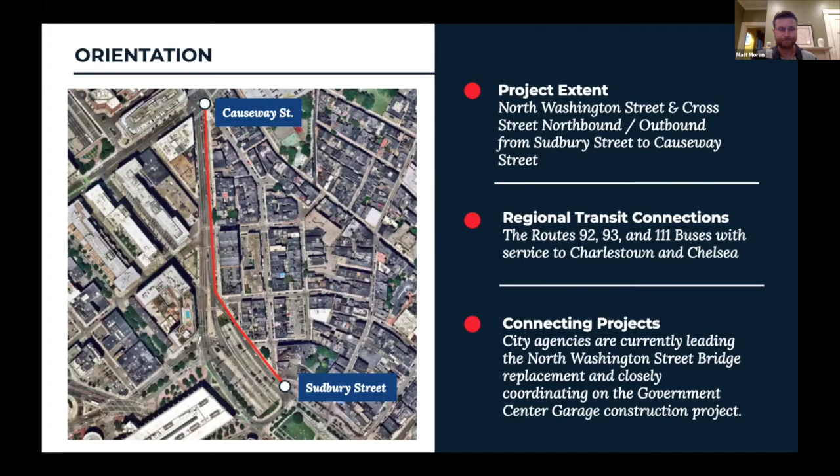So why North Washington Street? Before the pandemic, and to some extent now during the pandemic, we know that there's a variety of delays that hinder bus operations. I'll also note, we've heard concerns among residents of speeding and vehicles that move too fast in the corridor.

We also know that there's high enduring ridership on this corridor. The overall MBTA system, specifically the bus system, is carrying about 50% of its pre-COVID ridership. But the Route 111 specifically is actually up to its pre-COVID ridership numbers. That's 13 to 14,000 bus riders a day if you combine it with the 92 and the 93 and a few of the other regional routes that use North Washington Street.

So a huge number of people are on buses, and there's huge implications if people can't properly socially distance on buses.

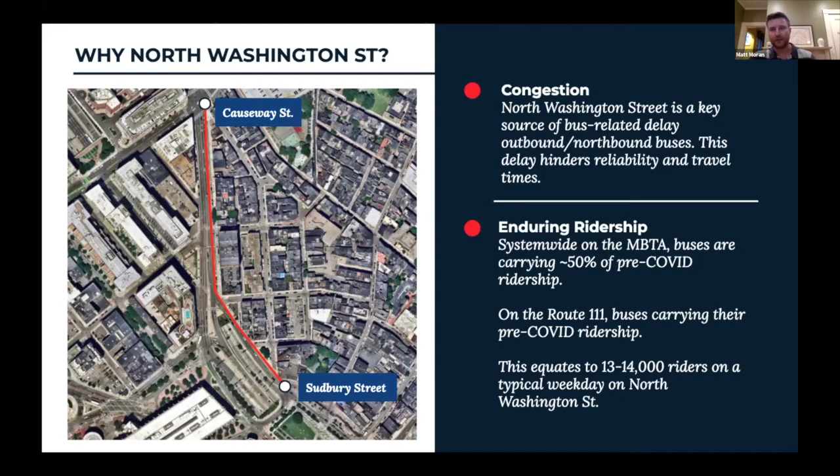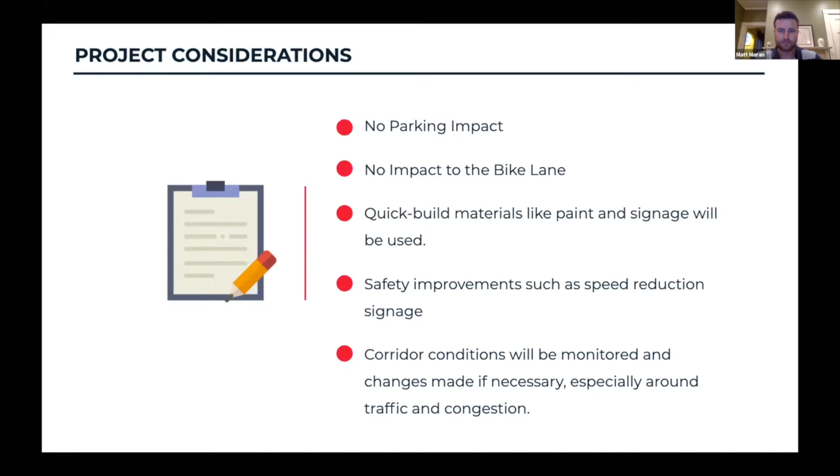So what are the project details? As I mentioned before, we are not looking at any parking impacts, and we are not looking to impact the bike lane. We're looking to use quick build materials like paint and signage, meaning that if there are changes we need to make later, we can easily scale back the bus lane or add other features in. We're looking at safety improvements such as speed reduction signage, and we're looking at monitoring the corridor. I'll get into that in a few minutes.

So what are we looking at here? We are looking at a condition with the bus lane where it would mix with traffic on this little segment of Sudbury Street, merging onto Cross Street. As it gets up to Stillman Place, cars could enter the bus lane to make a right turn or to get through the intersection.

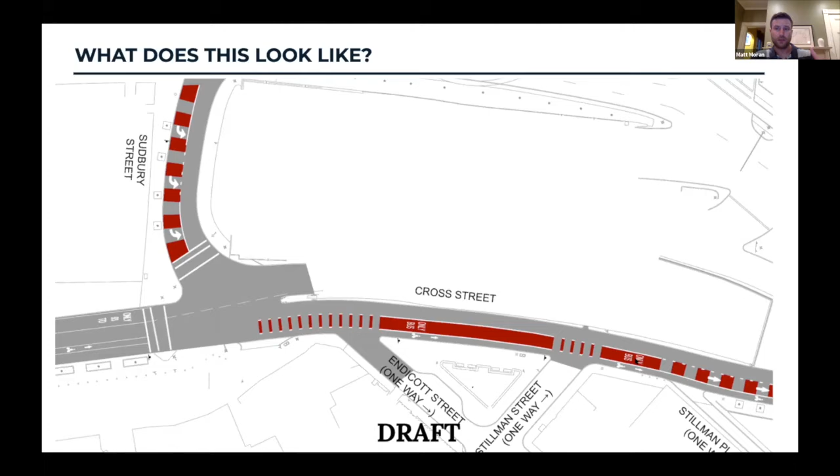And once we get past Cooper Street light, cars again can enter the bus lane to make a right onto Thatcher Street. We would also preserve that left turn onto Valenti Way. Cars that are continuing through the intersection would continue through in that center lane.

For the last stretch leading up to the Causeway Street intersection, most general purpose traffic would continue along North Washington Street up to the light. During periods of heavier congestion, we would imagine a lot of cars will merge into the bus lane for the last 250 feet of the bus lane. This enables us to have roughly the same throughput through that traffic light as we do today, but the buses would essentially be able to skip a lot of that queue and get up to the front of the line.

So what are the project impacts? We're anticipating the buses will save 2 to 3 minutes at peak times, which essentially means they'll have a much more reliable trip in addition to saving that time. The T also believes they'll be able to add some extra trips given that better reliability and that ability to have buses save a little bit of time.

A typical driver will see a minute or two of additional travel time along this entire stretch. To put that into context, a standard radio station commercial is about 30 seconds long, so a typical driver will sit through an extra 2, 3, 4 radio station commercials along this entire stretch of road. So it's not a huge impact for a typical driver.

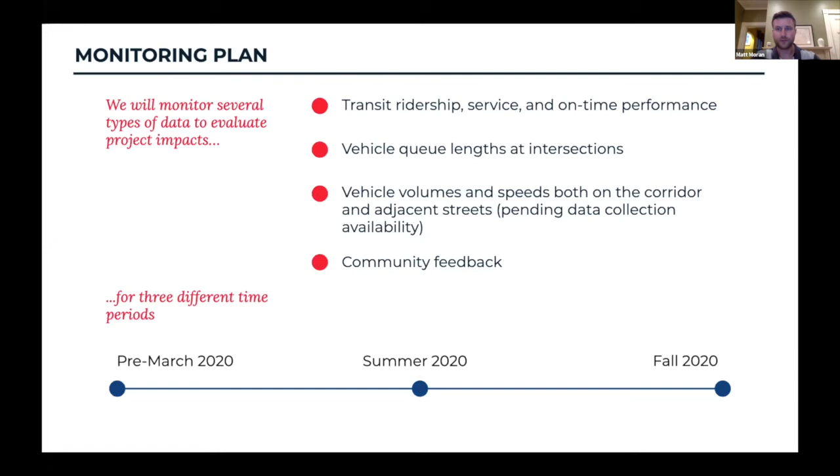So in short, that's really the monitoring plan that we're hoping for. We'd love your feedback on that, and also on all the other elements of this project. So briefly, to conclude: next steps moving forward, we're going to conclude the public and stakeholder engagement, continuing to hear back from this group and other community members who want to comment. We'll confirm project details at that point, like signage, striping, light cycle timing, all that engineering-related stuff. We'll look to potentially implement this fall, pending feedback from the community, and we'll develop and implement the monitoring plan once, or if, this project is implemented.

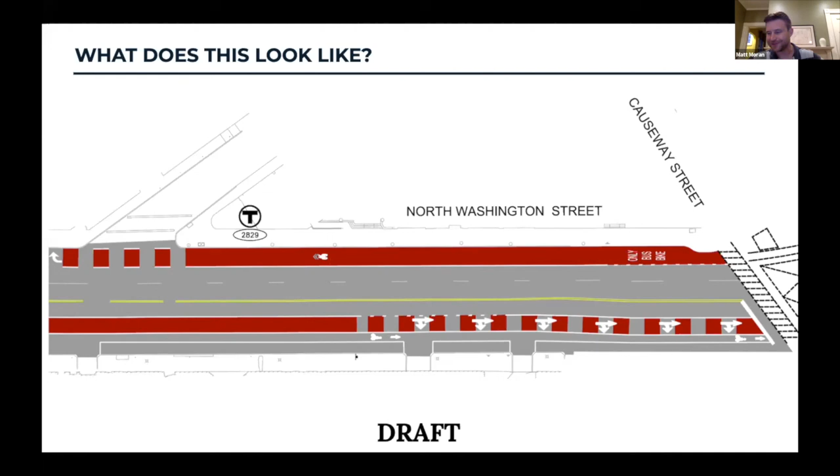To the point I mentioned earlier, buses will continue to pull in. They'll merge out of the bus lane, pull into the stop up against the curb just like they do today. Then once they leave, once everyone gets on and doors close, they'll merge back over into the bus lane. So it'll operate very similarly to how it does today.

And then, I apologize, speeding. So we'll work with the MBTA and flag that for them. I wasn't aware of the speeding issue for the inbound lane, but we'll make sure that is addressed, and we can post speed limit signs on the southbound side as well to make sure T-buses abide by that 25-mile-an-hour rule.

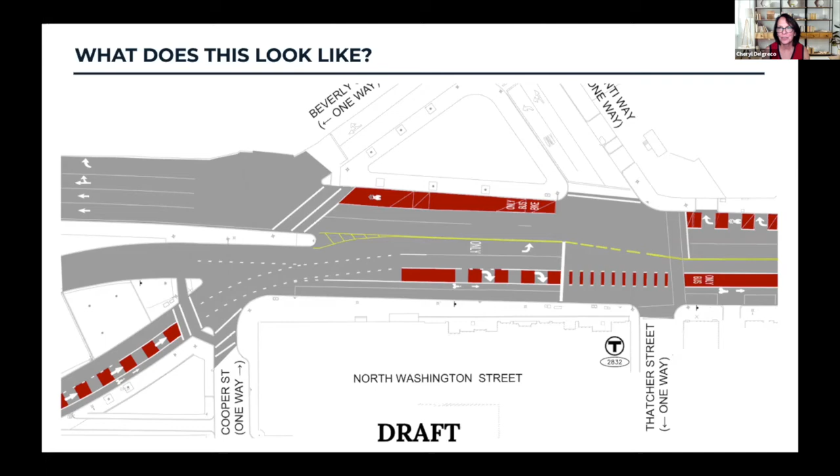Do you see it? And Rob, I unmuted you. There we go, let me try to now share my screen with you. While you're doing that, I have unmuted the other folks from the Chiofaro Group, Don Jr., Don Sr., and Steve Mitchell. You are all on.